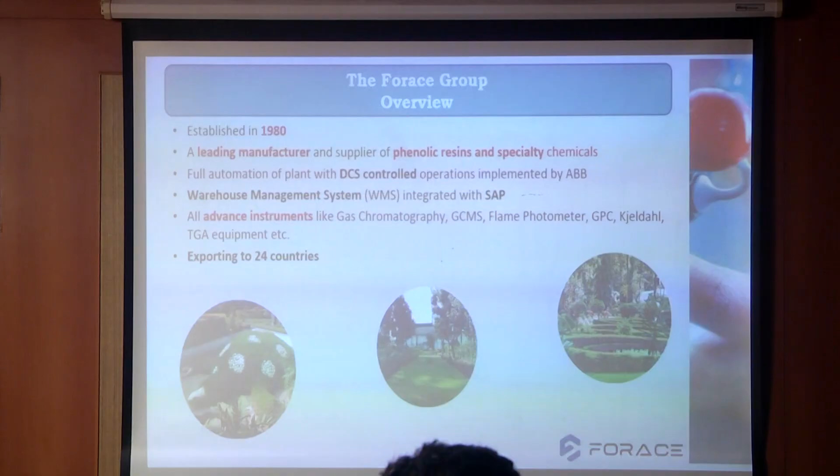So this is, you already know about FORACE, just a brief introduction. We were established in 1980. We are the leading manufacturers of phenolic resin and specialty chemicals, and recently, in 2022, we have started sleeve manufacturing also. We have fully automated plants to manufacture resin and coatings, and we are exporting to almost 24 countries.

There is always a request from various foundries to save some metal or improve yield. So I have considered only a 5% yield improvement, or how we can save 5% for the foundry. First, we can save 5% metal, or we can save 5% of cost. If you save 5% of metal, it will be saving the metal, producing more, and selling more. And if you save the product cost, you will get some extra quantities, additional benefits to the profit.

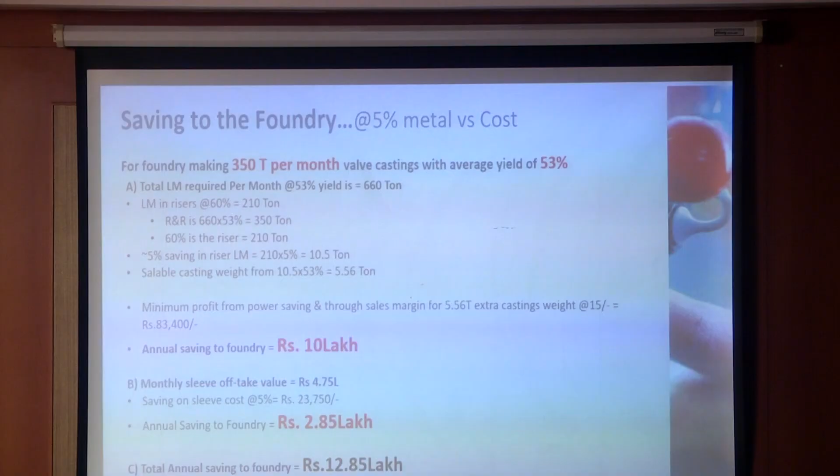For your example, I have considered a steel foundry manufacturing 350 tons per month with an average yield of 53%. If you save 5% of metal, annually you are going to save 10 lakhs of rupees. And if you save 5% of product cost, you will save approximately 2.8, or about 3 lakhs of rupees per annum. So overall together, it will be around 13 lakhs of rupees we can save.

So whatever we are offering as a customized solution, it is beneficial for both. It is for OEMs as well as for foundries. If you consider both together, we can reduce the casting, meaning the casting design can be foundry friendly, then the design will be friendly to the foundry, and it is a simplified design which will be castable.

Because of that, the development time will be reduced. It's similar for the foundry, meaning for the foundry also we can reduce the development time. We can get first time right or maximum second time right solutions. Also we can save some cost and we will get the maximum yield.

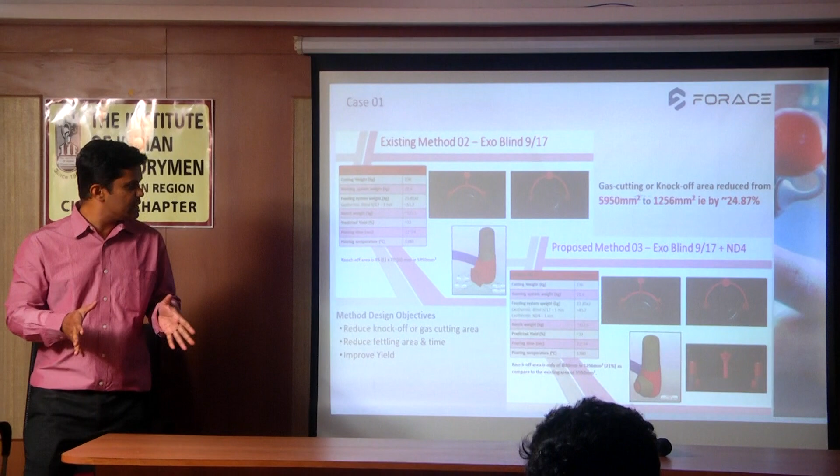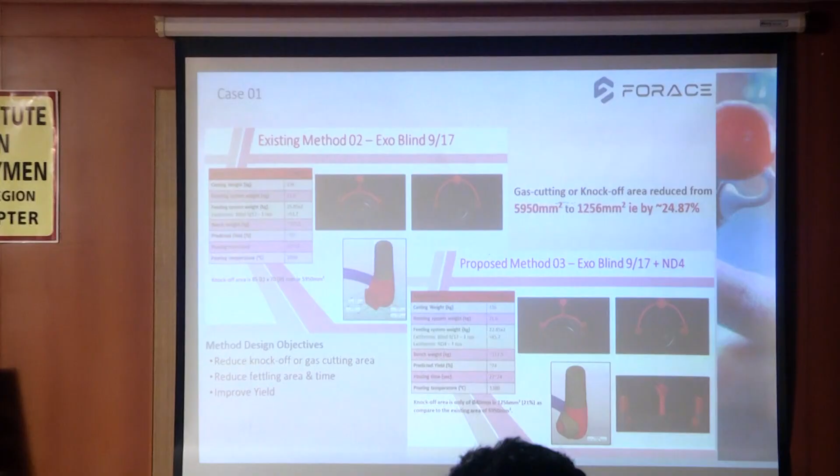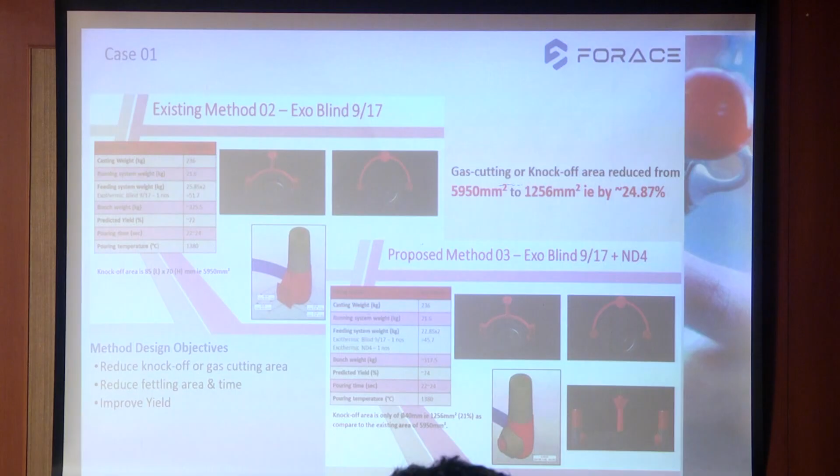By which the area has been reduced by almost, you can say, reduced up to 1200 mm square only. So we can easily knock it off, and the castings are moving faster.

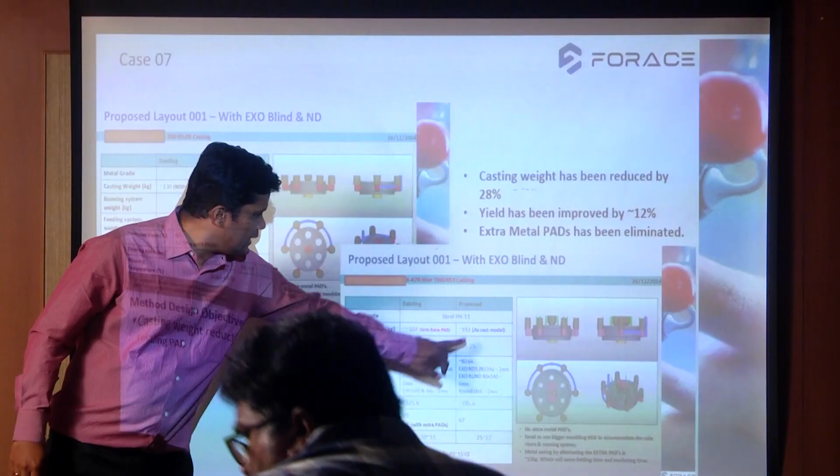So this is a second case study where the customers have added some extra metal, or they have increased the wall thickness of the casting, so that the casting weight has been increased from 90 kg to 130 kg in one case, and from 192 kg it has been increased to 210 kg.

So that much extra weight or extra machining they are doing to get the casting right, or get the feeding pattern in a directional solidification type. So we had to do this project, and we suggested them - you can say we have eliminated all the extra padding or extra wall thickness they had done, and the castings are okay now.

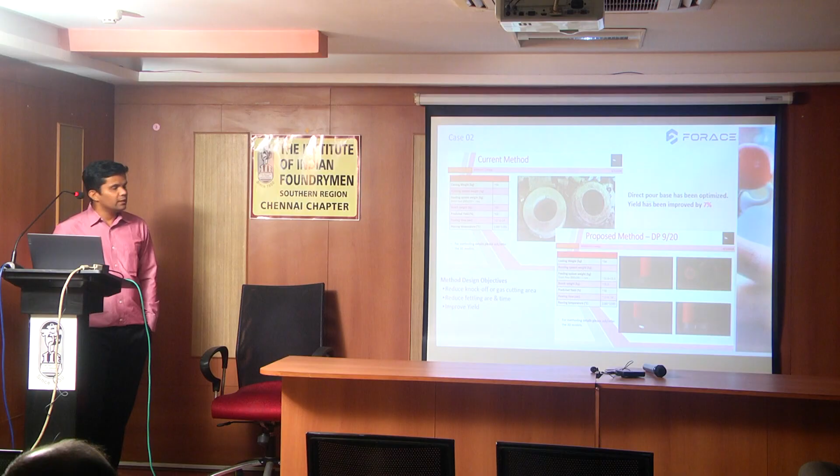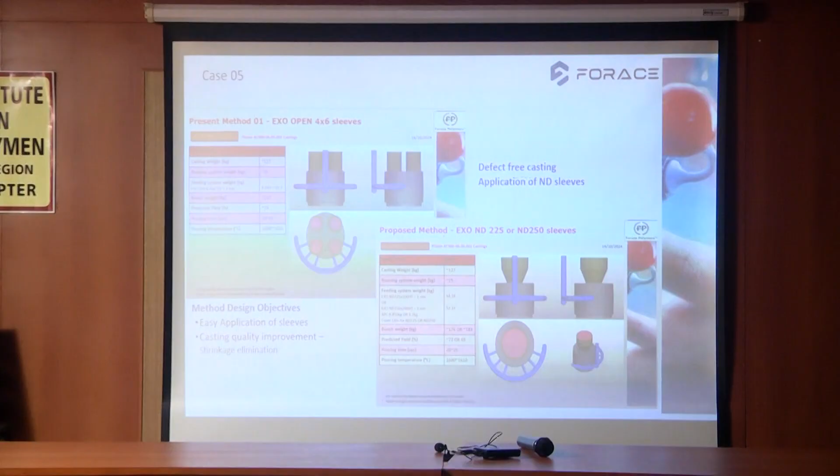Here also, the customer previously was using 4 sleeves and they wanted to eliminate or ease the application of the sleeves. So instead of 4, we proposed them only 1 neck down sleeve, and the castings are going okay.

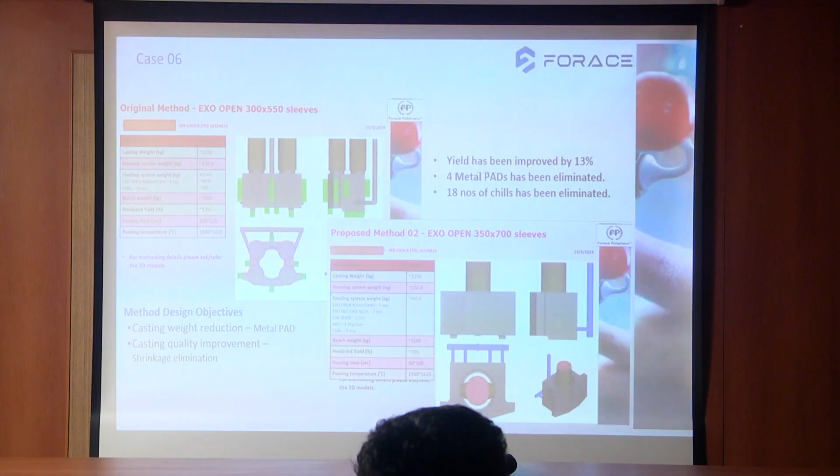In this case also, the green color shows the chills, and on top of this they are given 4 sleeves with extra pad. The task given was to eliminate the chills and remove the extra pad. So we proposed a central sleeve, similar to the first proposal, with neck down sleeves. All chills have been eliminated - 18 numbers of chills were there, so in our proposal now there are no chills.

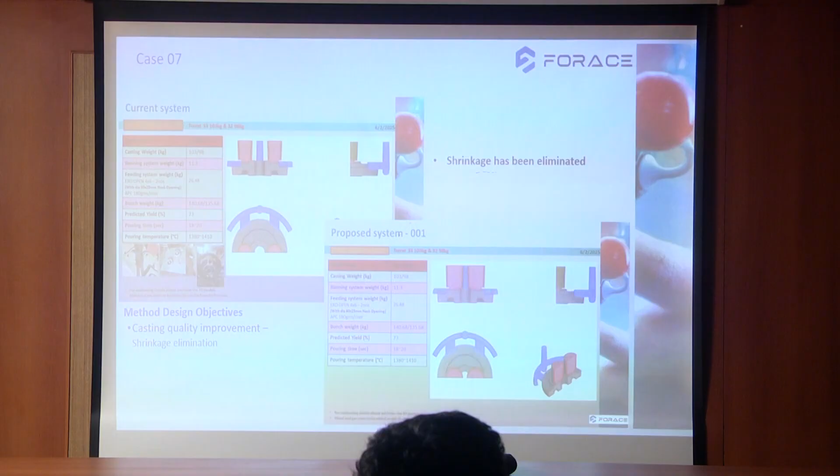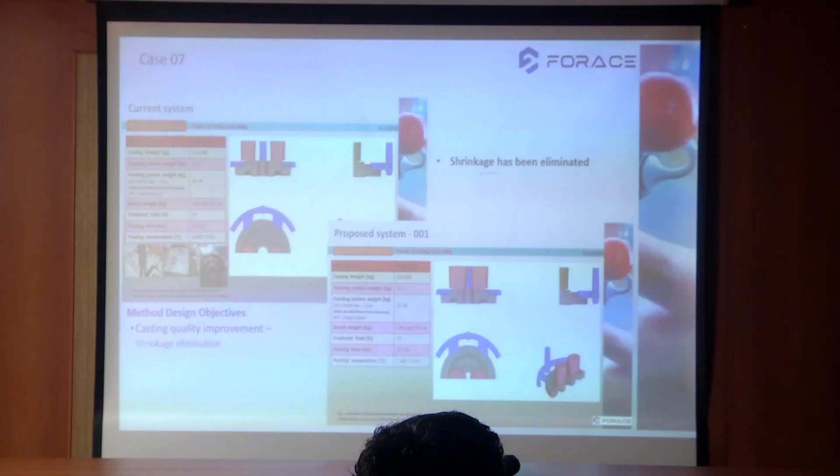So this is also a defect. They were getting some defect under the risers because of wrong selection or wrong placement of the sleeves. So we did the simulations and gave the proposals, and we adjusted the location of the sleeves so that the defect is eliminated and the casting will be fed at the hotspot itself.

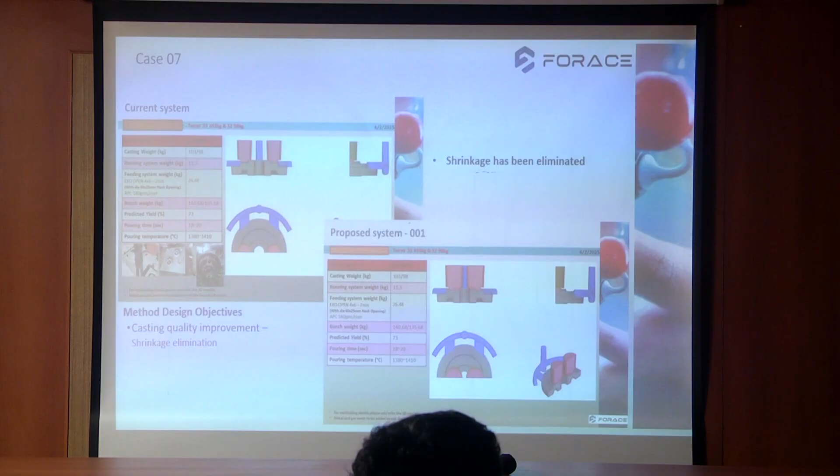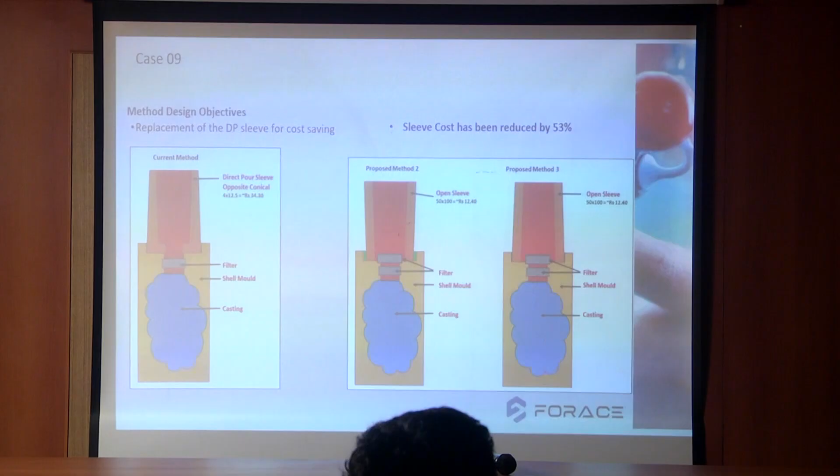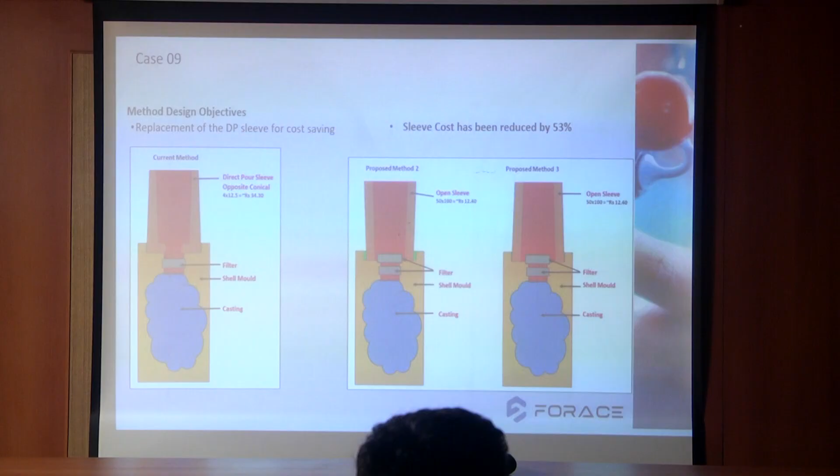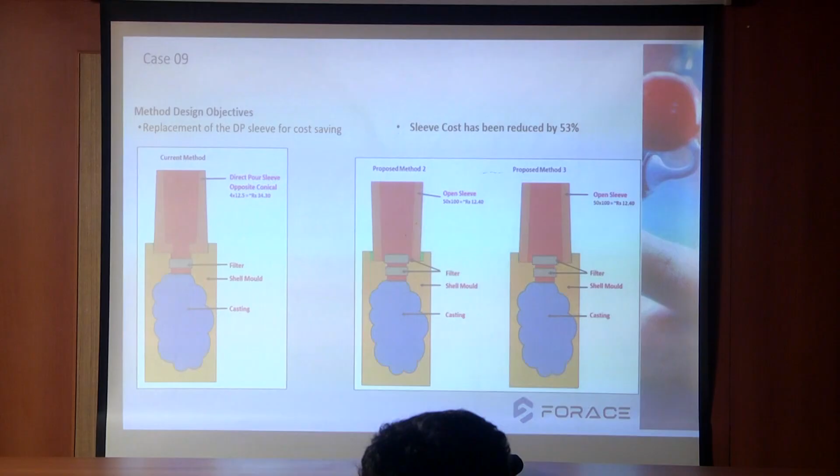So this is a case study for shell molding. Customers are using direct pour sleeves in a shell. What they asked us is to eliminate the direct pour sleeves or reduce the sleeve cost. So we suggested them an open sleeve with the filter, and made some changes in the shell itself. The sleeve cost has been reduced by almost 50%.

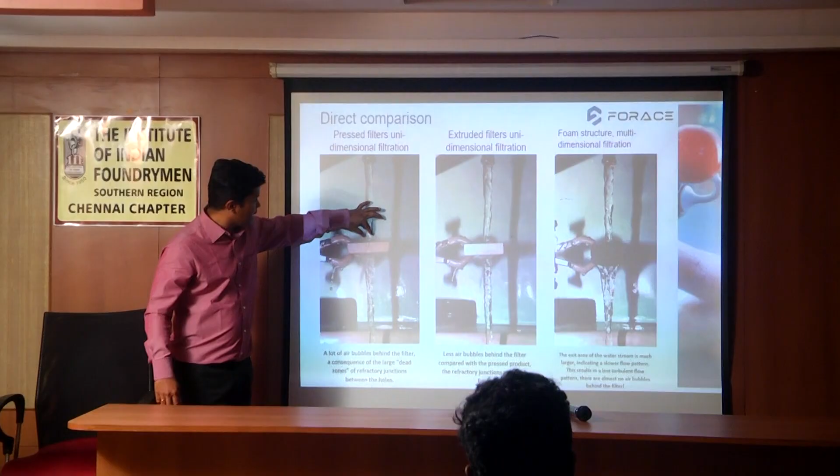So you can also check the flow. If this is the diameter, then almost equal diameter is getting outside in the press filter. But in the foam filter, you can say it's almost a diverging type - the foam filter is using the full area of the filter.

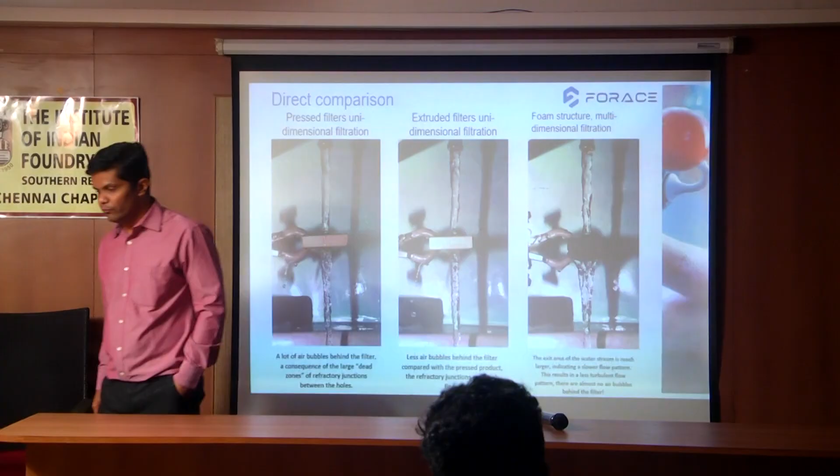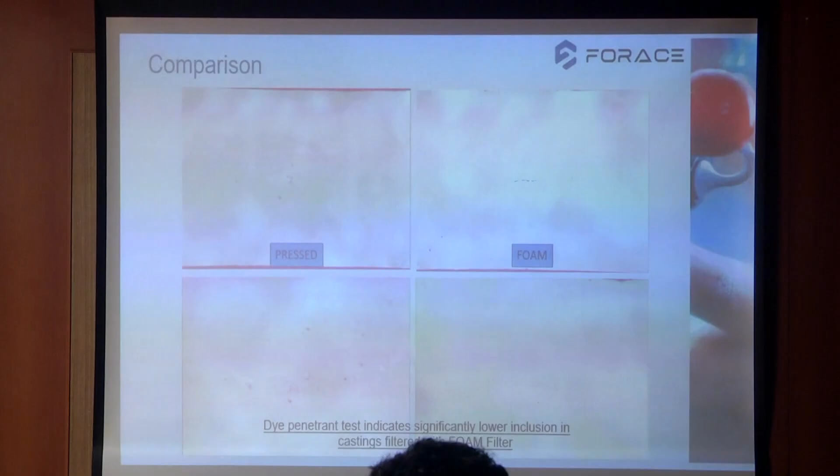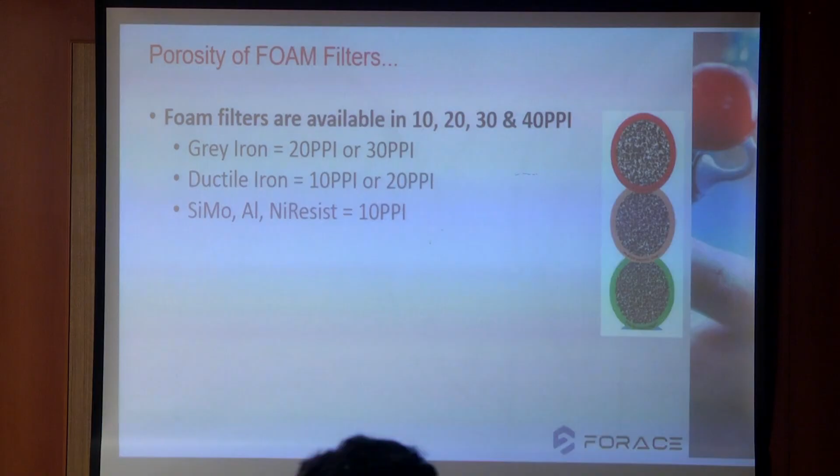For grey iron, it is always recommended to use 20 ppi or 30 ppi. For ductile iron, you can use around 10 ppi, or in some cases you can go for 20 ppi also. And for Ni-Resist or SiMo grade, you can use 10 ppi filters.

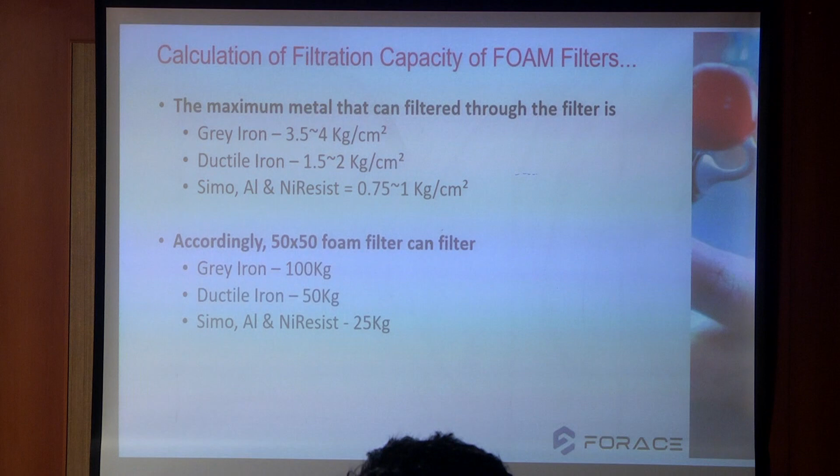So how to calculate the filtration capacity? If you consider a 50 by 50 filter and you are going to pour grey iron or CI metal through it, the filtration capacity will be around 100 kg, or the filtration rate will be around 3.5 to 4 kg per centimeter square. So you just have to calculate the area, 50 into 50 into 3.5 or 4, and that number will give you the maximum filtration capacity of the filter.

Similarly, you can calculate it for ductile iron or grey iron. For ductile iron it will be half, around 50 kgs, and for Simo and NiResist or aluminum castings, it will again be half, around 25 kgs.

So now, how to calculate the running system? So far, any doubts?

So basically, we need to fill the casting as quickly as possible, as quietly as possible, and as cleanly as possible.

So this is the first step by which you can calculate the pouring time, which is crucial for the designing of the running system. So this is the formula.

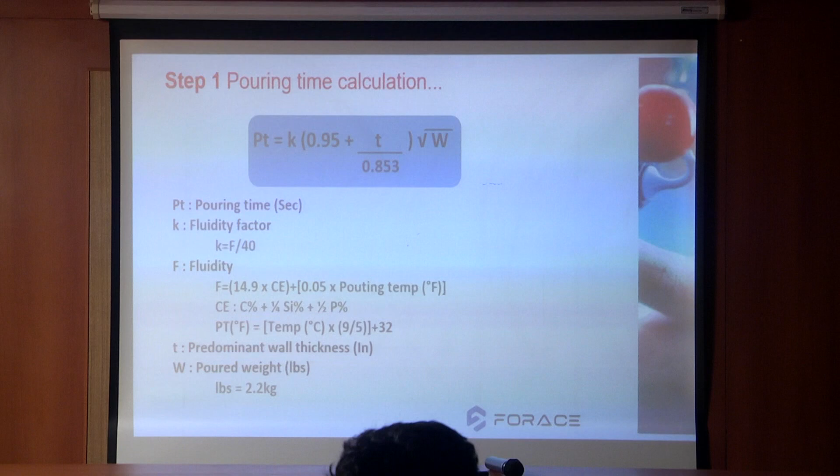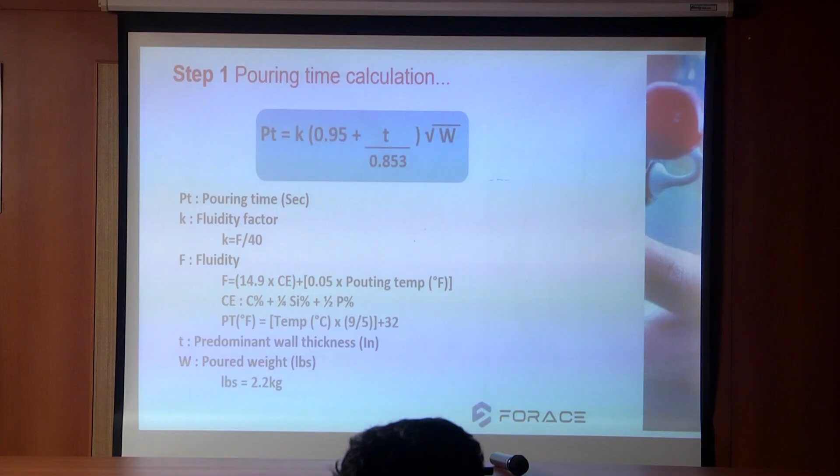The simplified version is like that. You can just calculate the bunch weight, multiply it by 2.2 and take the under root of it, and you can adjust within plus or minus around 10% of it, so that you can get an approximate pouring time or required pouring time for the calculations.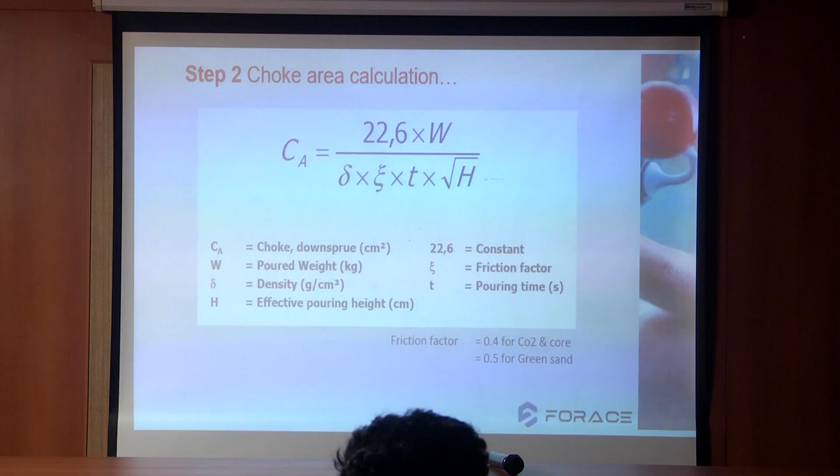The next important thing, we need to calculate the choke area. This is the formula for the choke area calculations, which will govern the pouring time.

Next part is the head height, or you can say head height required to fill the casting with the pressure.

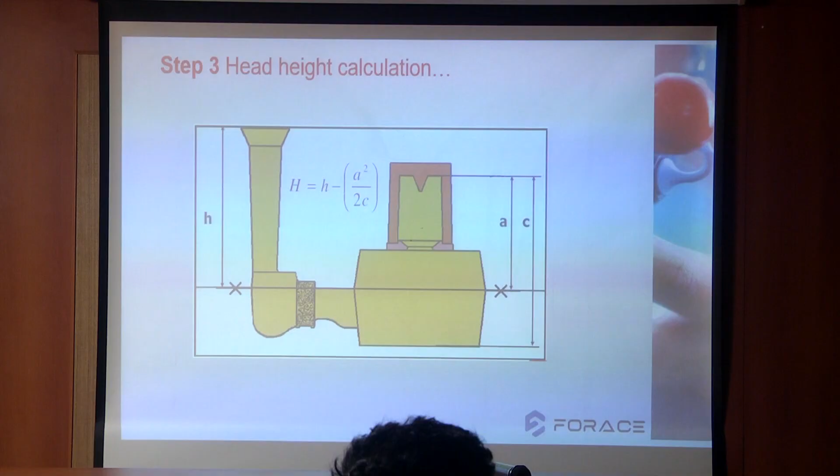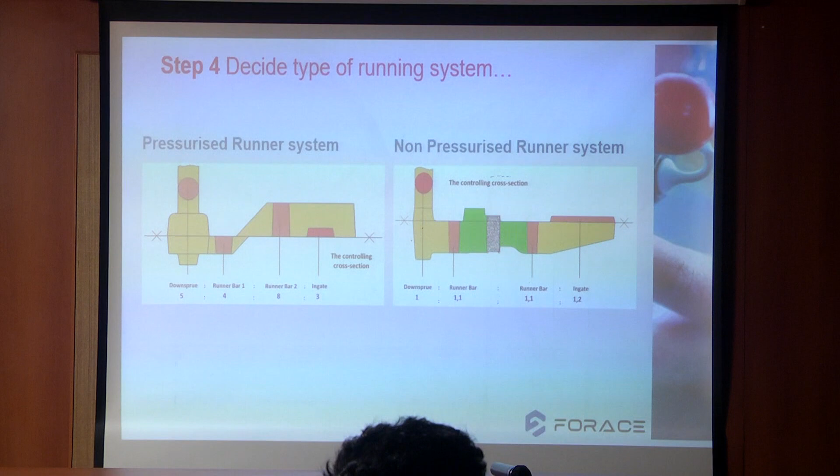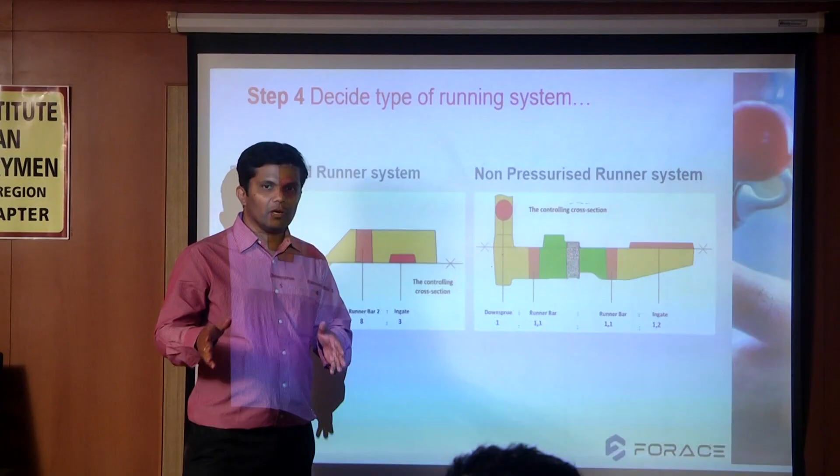After all these things, you need to decide which type of running system you want to use: pressurized or non-pressurized. The difference between both is that in pressurized system, the controlling area, what choke area we have calculated, will be at the ingates, and these ingates will control the velocities as well as the pouring time of the system.

But in non-pressurized system, the area goes on increasing. The choke area will be at the downsprue or very near to the parting line, then the area is increasing.

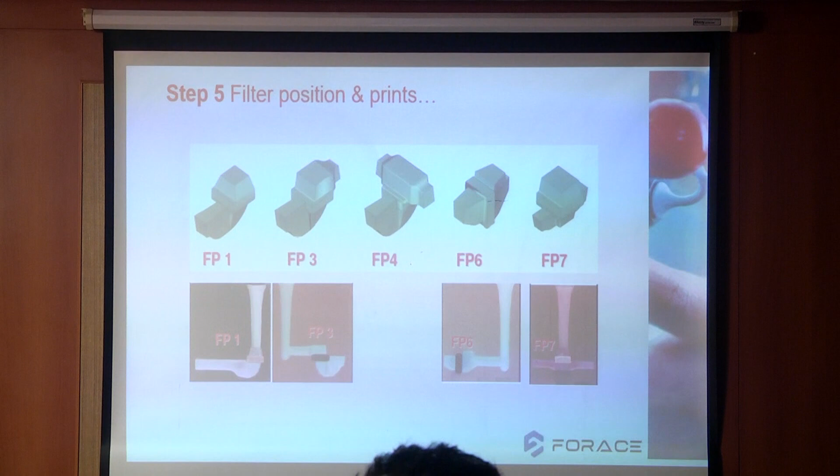So after calculating and selecting the pressurized or non-pressurized system, you have to select the filter position - how you are going to place the filter, whether it is horizontal, vertical, or at an angle - and accordingly you need to select the filter prints.

Now some information about the feeding systems as well. So in feeding system we have sleeves, mainly insulating and exothermic. In that we have open sleeves, blind sleeves, neck down sleeves, separate cones, direct pour sleeves, boards, and cover lids.

That I will show you - all these details I will show you in the next slides. In powder products we have anti-piping compounds, and also we have breaker cores for the sleeves.

And in methoding solutions, you already know, we can support various foundries in improving the yield, quality, and first time right solutions.

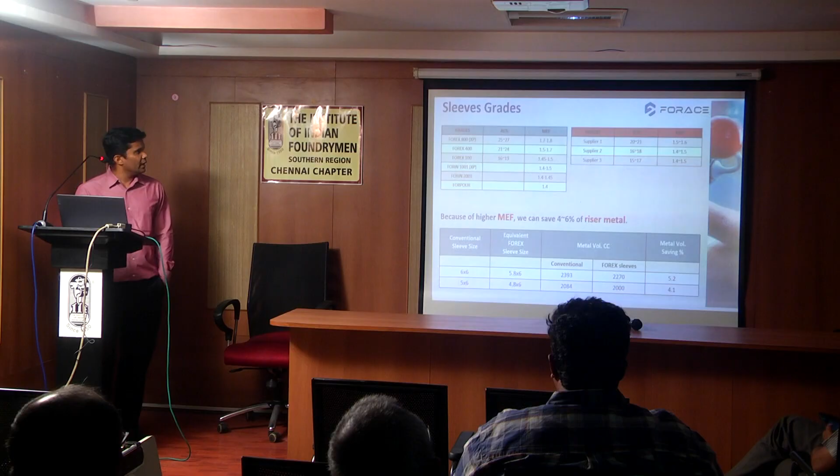So in FORACE we have developed, in exothermic sleeve, 3 grades. The premium grade is 800, then the medium grade is around 400, and the regular grade will be 100. Also insulating and direct pour sleeves are available.

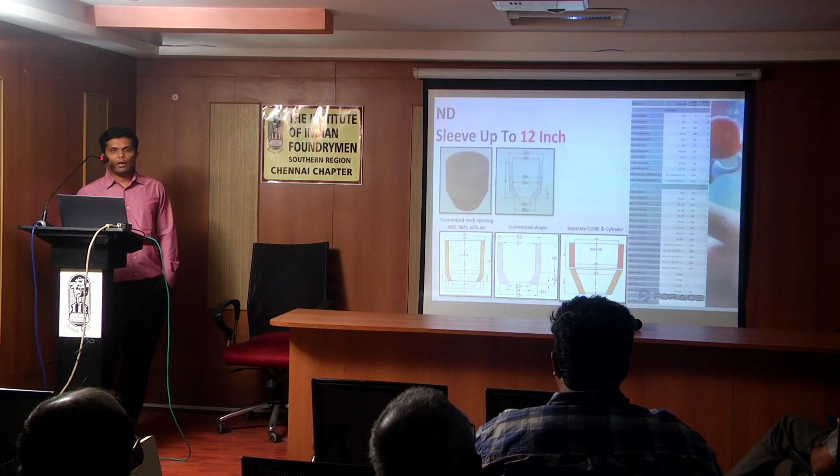Direct pour sleeves are also available with us, and neck down sleeves are also available. We are saying you can customize the neck down sleeves or neck shape whatever you want, or we can provide you the separate neck and the open sleeves.

Angle sleeves, what we have already seen in the case study, those are also available. Cover lids, to make a neck down sleeve or open sleeve as a blind, we can provide that also. Boards are also available with us.

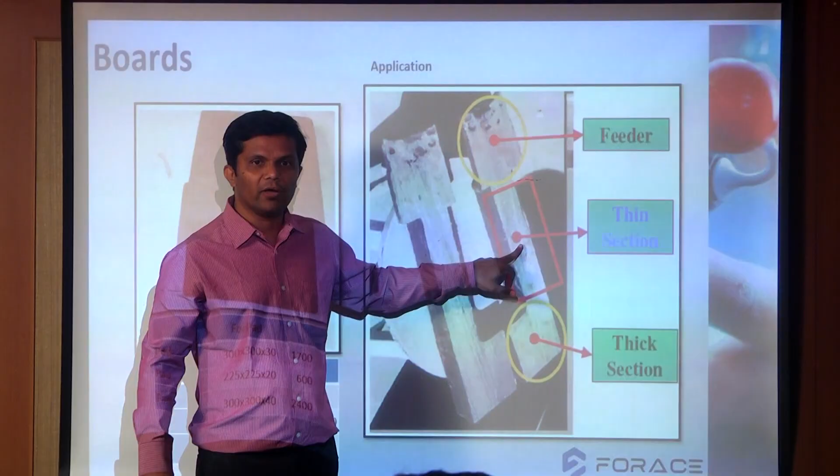The main principle or use of the board is like, if you want to feed this thick section from this thin section, generally in steel casting they will make a metal pad, and after that they will try to remove this metal pad. So instead of metal pad, we can put these insulating boards so that this channel will solidify later, and the metal will feed directly to the hotspot.

Various types of breaker cores are also available with us, which will reduce the gas cutting and the grinding work. We just knock it off and we can send the castings.

This is the working principle of the anti-piping compound. So maximum heat transfer will be from the top area. So if it is an open riser, you can put an anti-piping product to restrict that heat loss, so that the riser will remain in a molten condition for a longer time.

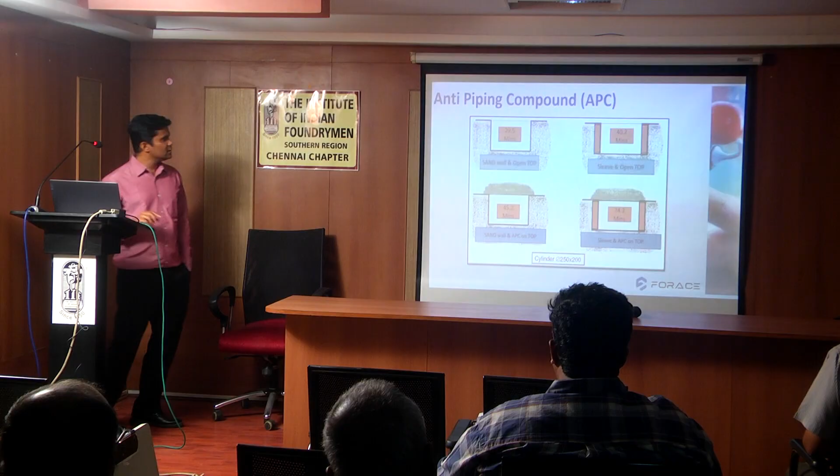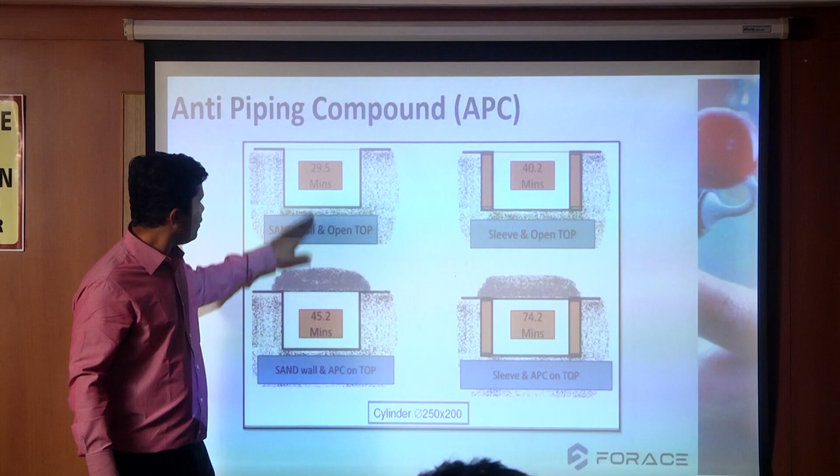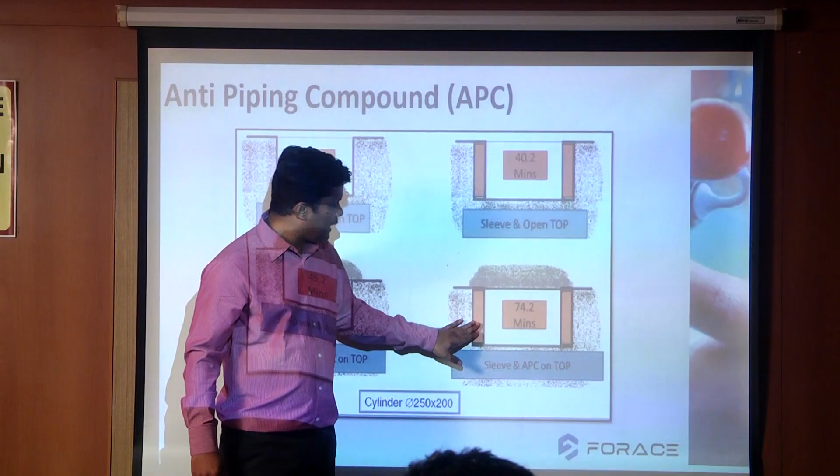So this is just an example - if it is an open riser, a sand riser, then it is solidifying in 30 minutes. If you put an open sleeve, then the solidification time is increased. Again, if you apply APC on the sand riser itself, and compare it with the regular one, the maximum heat loss will be restricted. And if you apply an open sleeve with APC, then again you can increase the solidification time.

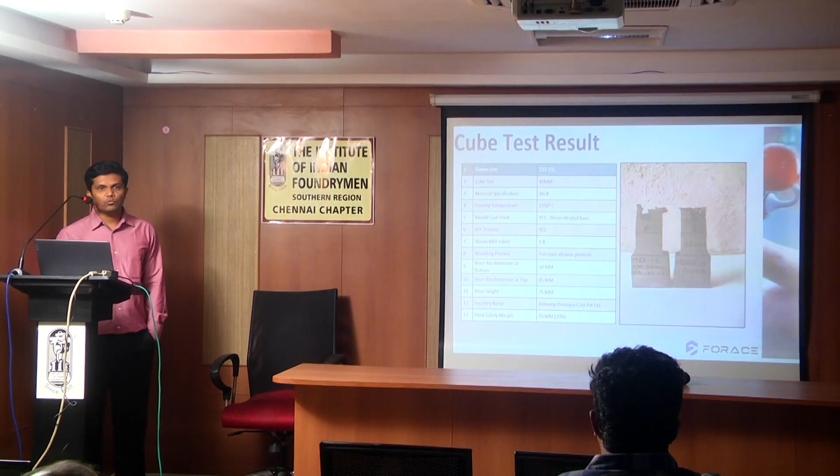So now in FORACE we generally do a cube test to test our sleeves' performance. Periodically we are doing the cube test for all the sleeve sizes whatever we are producing. So our target is to meet a feed safety margin of around 25% to 30%.

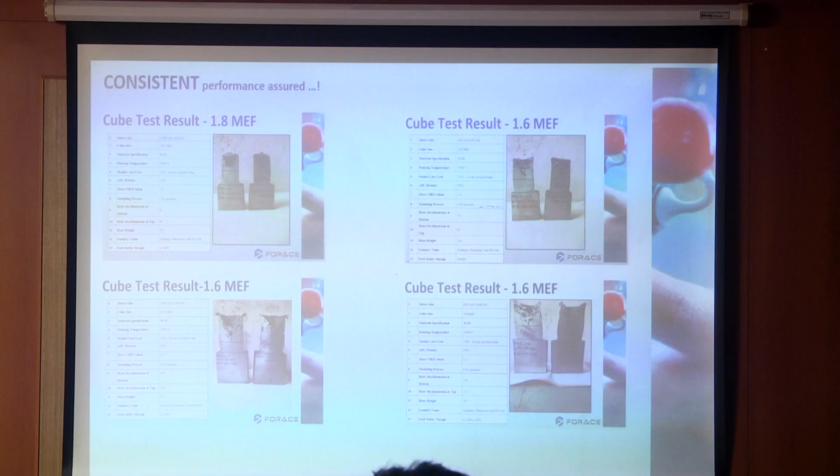So for all cube sizes or all sleeve sizes, we are doing the cube test periodically. For neck down sleeves also, we are doing the cube test.

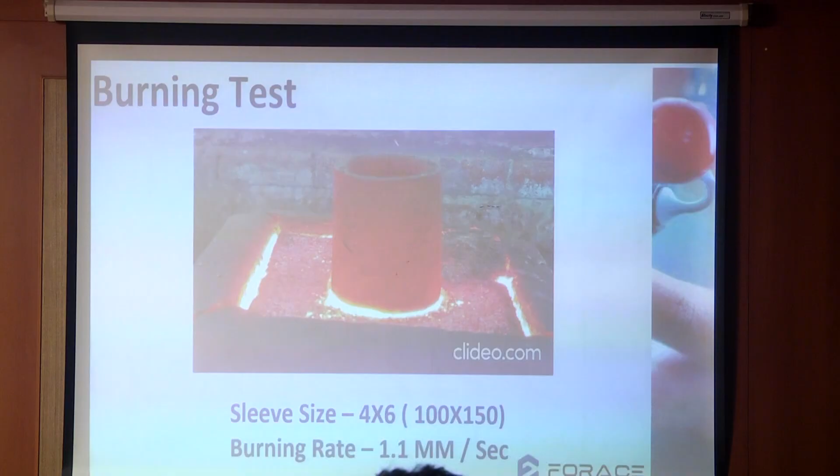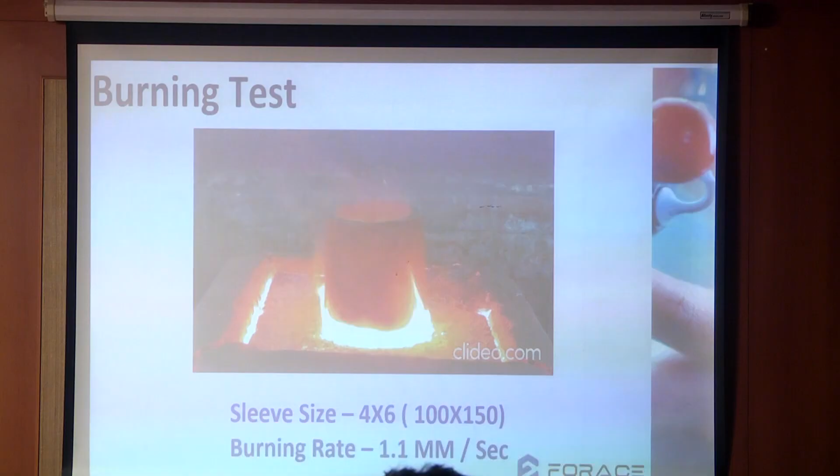This is the burn test or burning rate. So we are claiming the burning rate around 0.9 to 1.1 mm per second. This test we have done in front of the customer, or on the shop floor of the customer, where you want to test the sleeve.

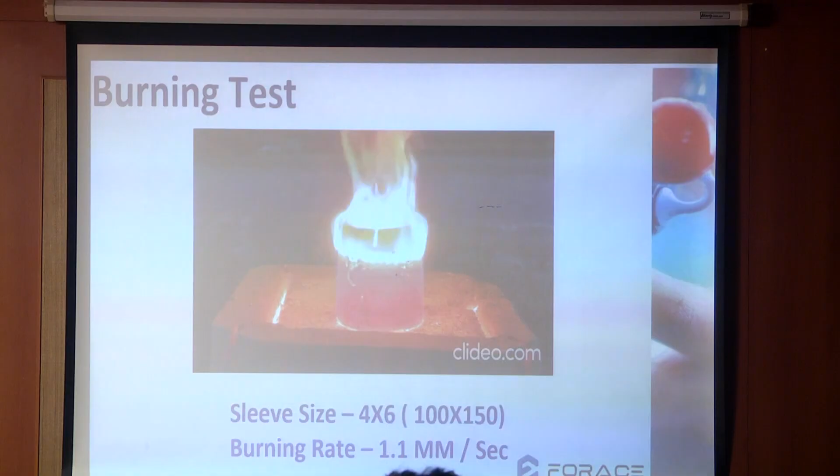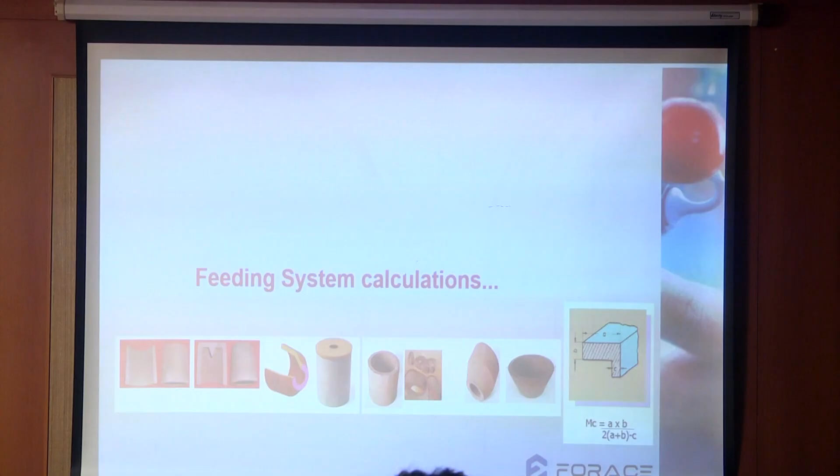Now, how to select the sleeves or risers? First, you have to decide what type of riser you are going to use, whether it is a sand riser, an insulating riser, or an exothermic riser. Or recently, you can say a hot product like high density sleeves. Then you can decide the type of riser - open, blind, neck down, or direct pour.

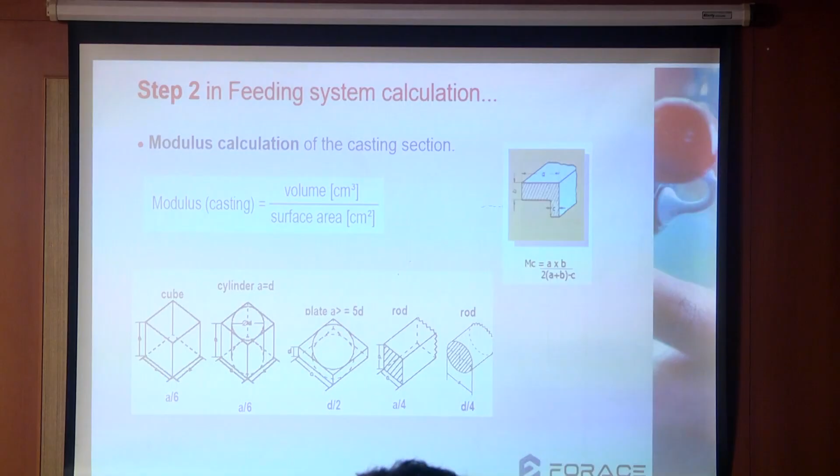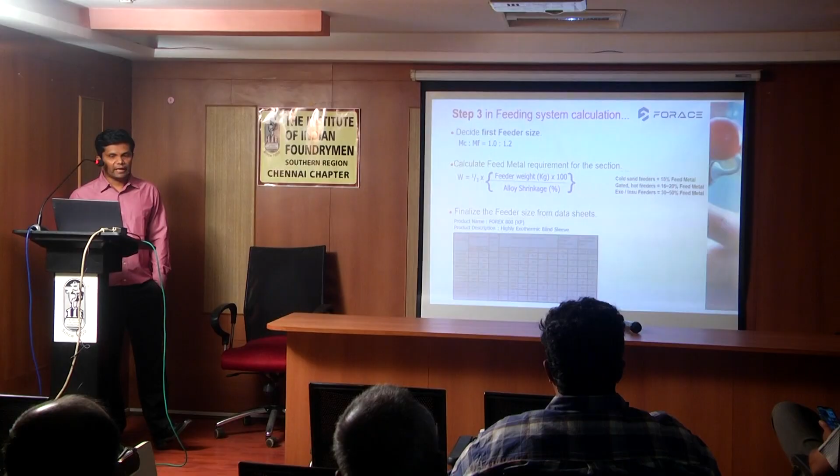The second step is you have to calculate the modulus of the casting, or it's better to go for calculation of the section or the hotspot. Then according to the casting modulus, you have to increase the modulus or select the greater modulus of the sand riser or sleeve riser. Then you can get one size of the sleeve.

In the next step, you have to calculate the feed metal requirement of the casting, which will depend upon the alloy you are going to pour and the shrinkage percentage of it. So with the available data sheet...

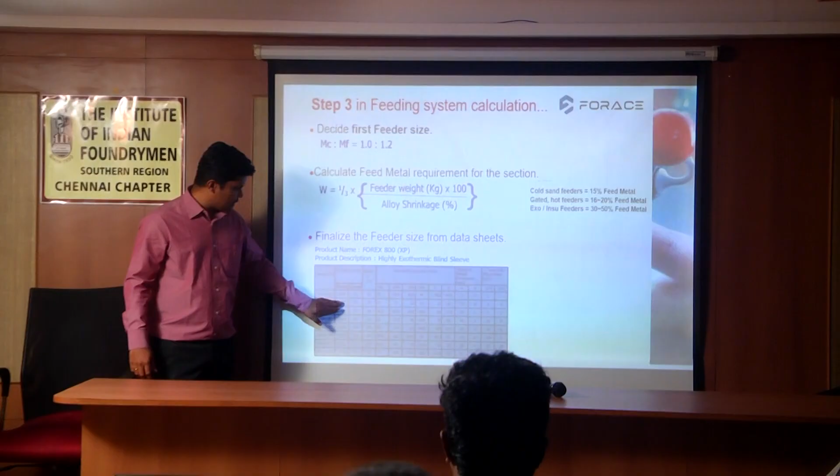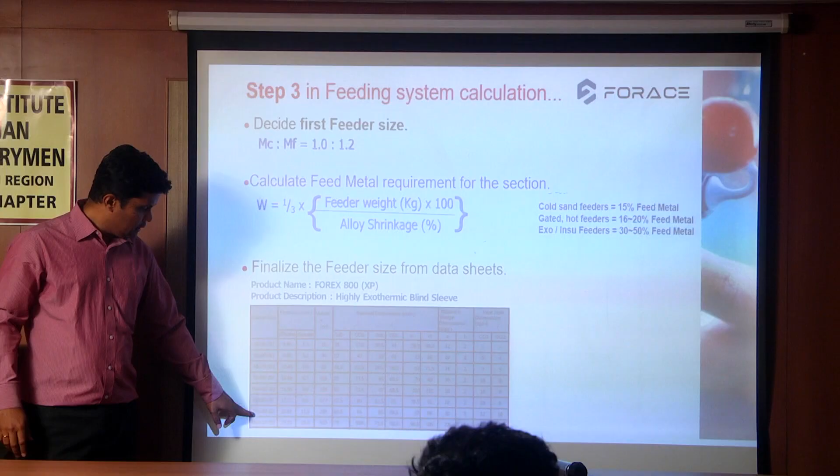This effective modulus denotes the sleeve modulus and this denotes the modulus of the sand riser. With the data sheet and these two sizes, you can select which riser to use. If you want to replace the sand riser with a sleeve riser, just calculate the sizes - diameter and height of the sand riser. Go to the data sheet, match that dimension with the data sheet, and you will get the modulus. This modulus you have to find in this column, or go for the higher side.

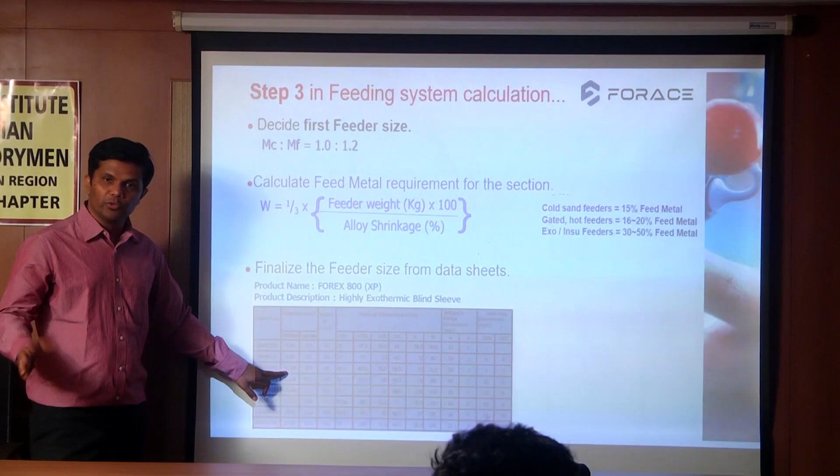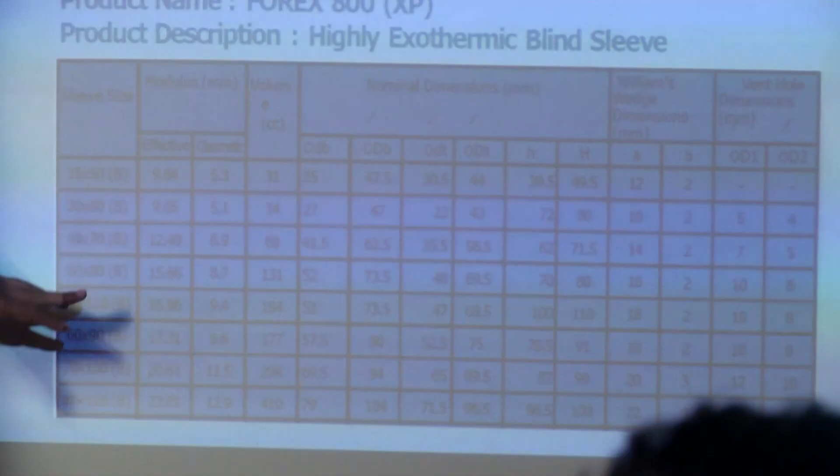If it is 70 diameter and 100mm height, the sand riser modulus is around 11mm. Then you find the same in the effective modulus, that is sleeve modulus - it is around 12.5. So you can choose the sleeve of 40 by 72 to replace the sand riser of 70 by 100mm.

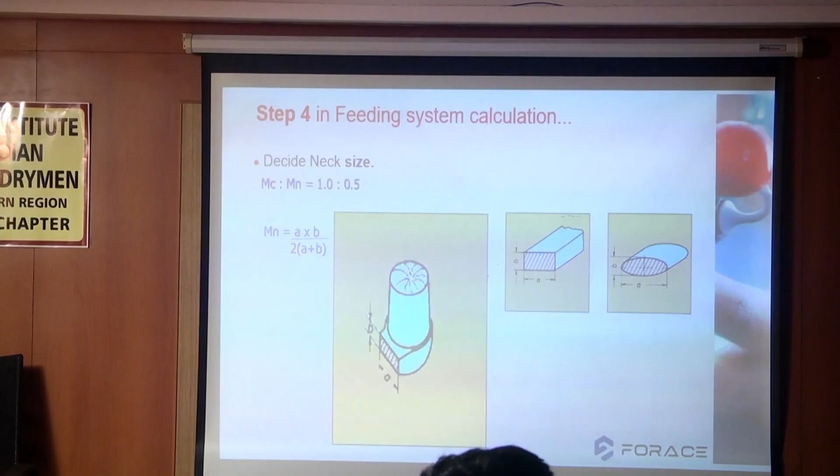Then you have to finalize the neck of the risers. Then you have to decide how you are going to apply the sleeves. There are three types by which you can apply the sleeve.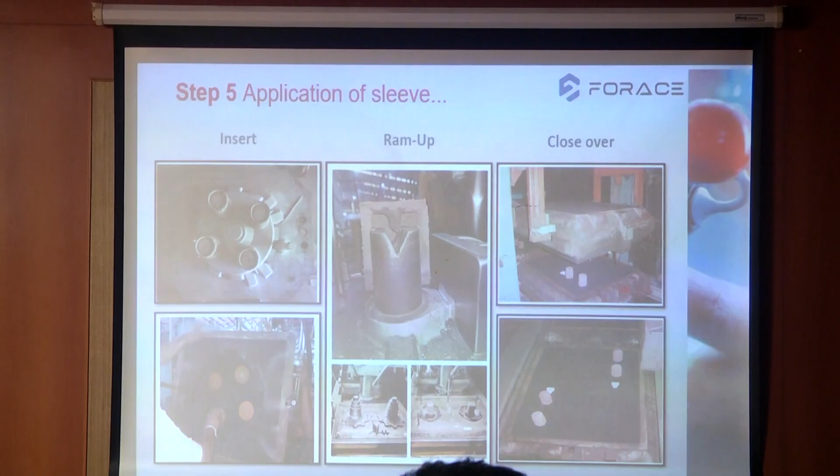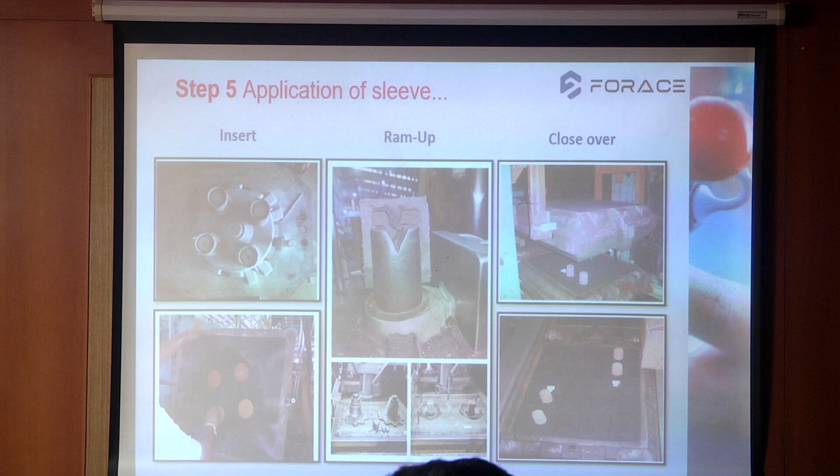First one is insert application into the mold - after the mold has been prepared, you can insert the sleeves. Ram-up application - before molding you put the sleeves on the pattern and it gets rammed up in the mold. And the close-over method - like you are putting cores in a mold, you place the sleeves on the drag pattern and the pattern will get closed.

So some field tests we have done - whatever proposals we have given, according to that we have conducted the field tests at various customers.

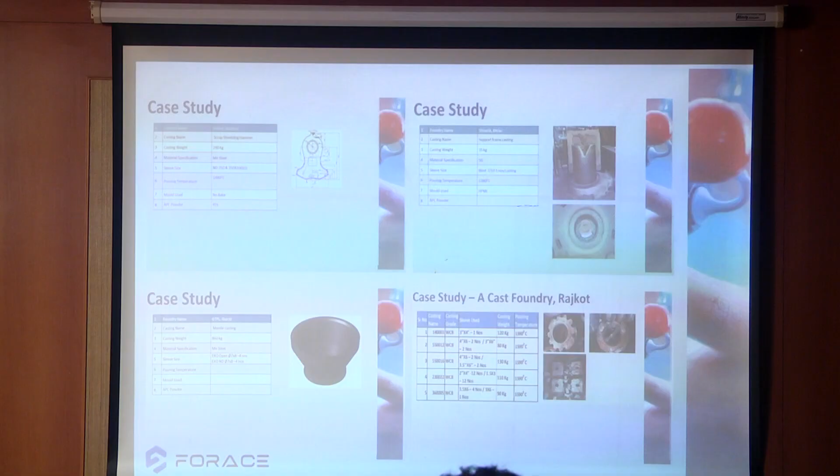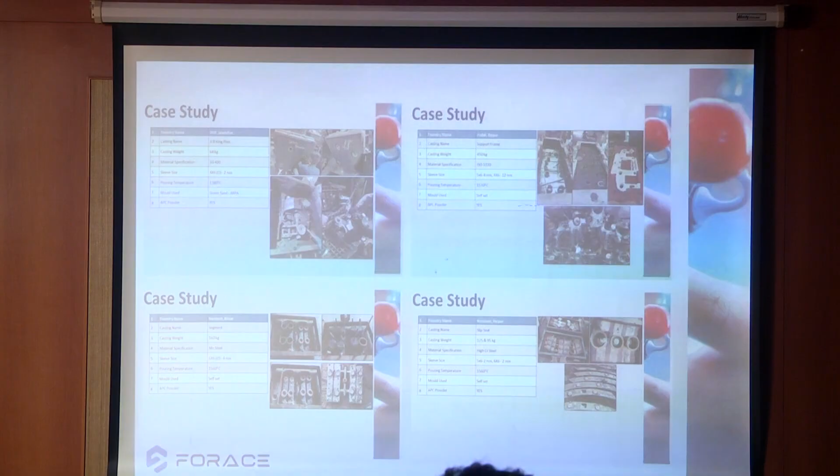So in our railway lines, railway castings also, we have successfully used the sleeves.

So that is the end, and if you have any questions we can discuss.

No, my question is, when the sleeve is burning, what is the temperature? Okay, it liberates the temperature, there will be some increase. So what we have tested is, this temperature has been increased by 150 to 200 degrees.

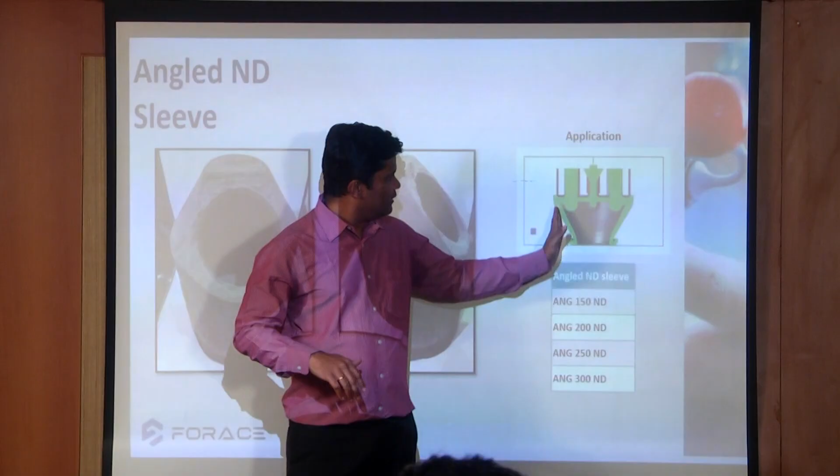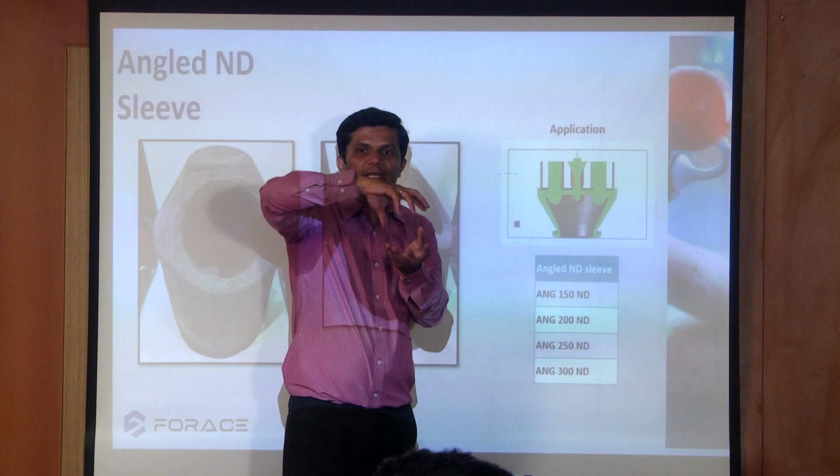So this angle we can vary. If the casting surface is at an angle, you cannot put the sleeve straight, or you need to cut the sleeve, reorient it, and then make it vertical. Instead of that, you can directly put it at an angle. That's exactly what this design is made for.

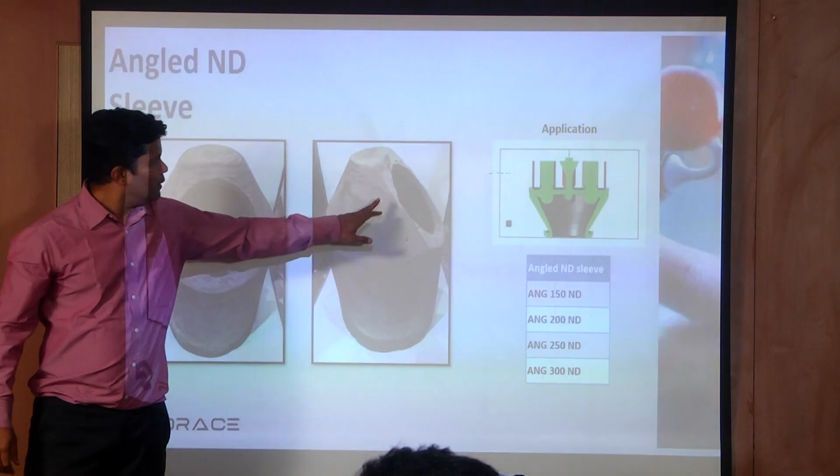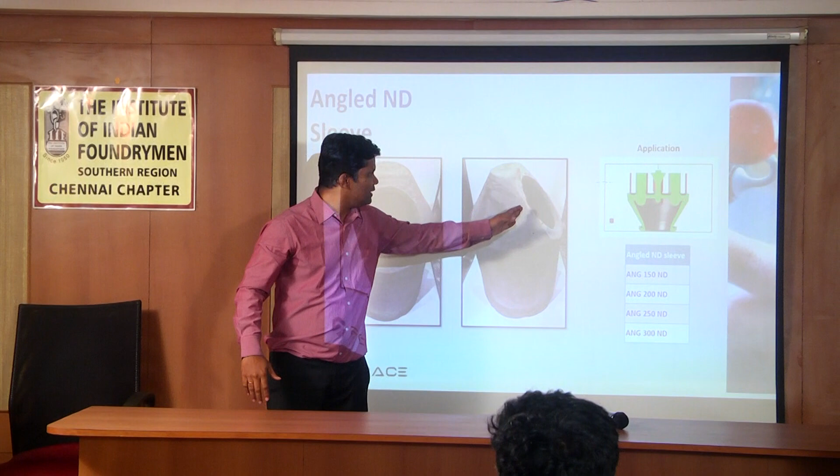So in this question, we have to place it next, sir. That junction needs an angle sleeve, maybe because the nose profile is very low. The angle and your casting profile need to be matched, because this angle sleeve is available in 30 degrees, 45 degrees, 60 degrees. So this angle should match the casting surface.

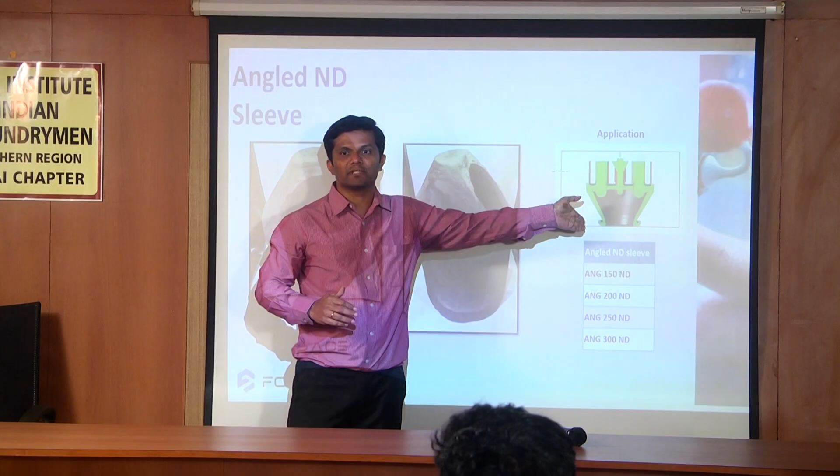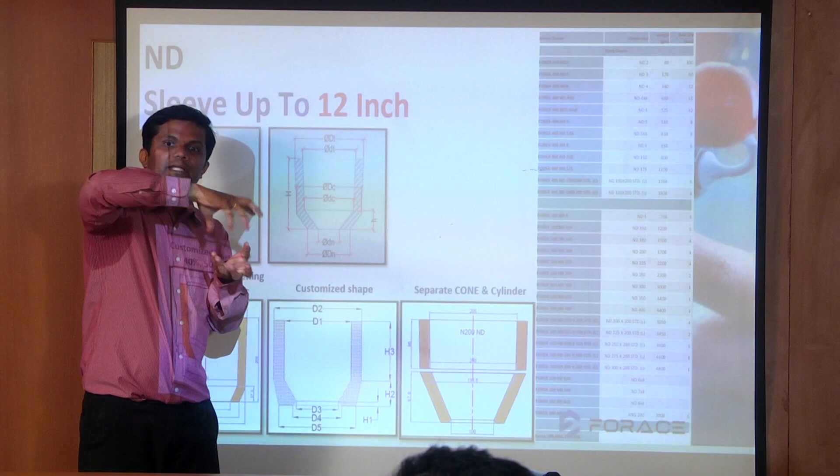So I've shown you one more application. You can buy these separate cones and put them at whatever angle you want. Then cut the open sleeve with the matching angle, reverse it, and you can put it in. This is a better option. Whatever angle you want, you can place it. It can be ready-made, or you can make it.

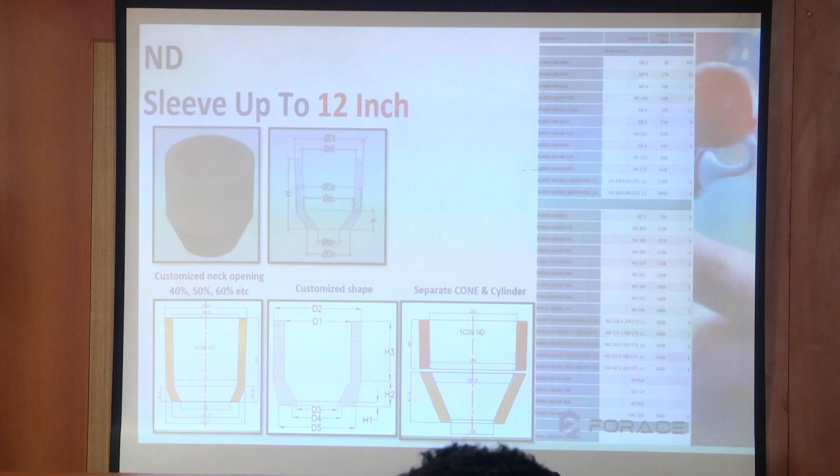Yes, you can use that. That is right. Otherwise, you can use this sleeve. And another thing, between the OD and outer wall diameter, there is a restriction in the sand thickness, so you may use this. You can give it also, so that the sand doesn't get heated.

It's a pretty good use. Pretty good use.

Neck down sleeves are generally recommended only to reduce the... it's better to use a breaker core, because in those days people used to have pads. It's also made out of exothermic material, but that will consume more metal. That's why the technology changed and this came about.